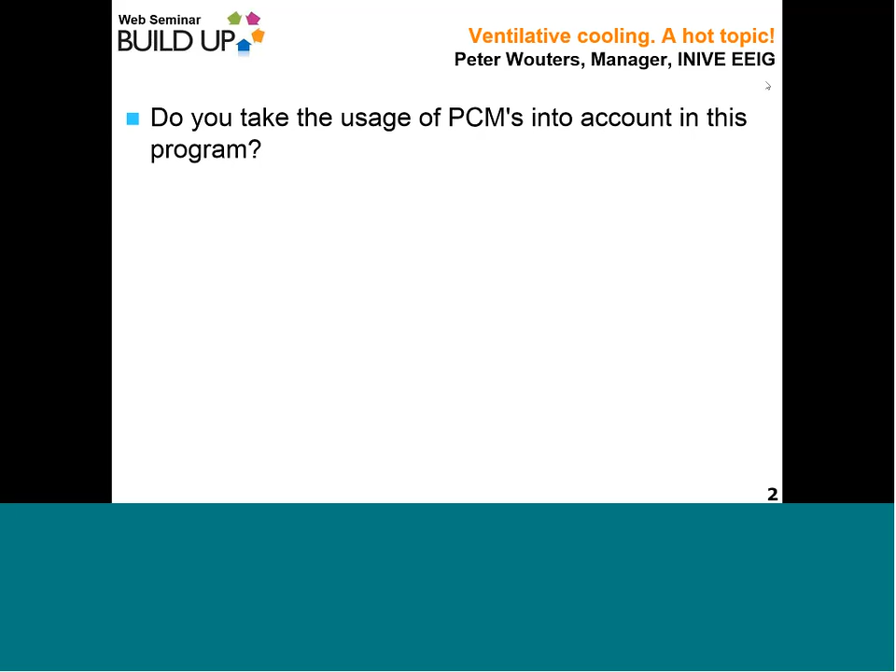Okay, thank you, Peter. Now let's go to the questions for Per. So Per, the first question for you is: the factor of speed of air circulation was mentioned in respect to perceived thermal comfort. Has it been found to have other influence, for example, restlessness? Actually, I'm not aware of that. There is some research progressing, but it's mainly focusing on what velocities are acceptable and what is the relation between temperature levels and acceptable air velocity levels. I am not aware of any influence on other parameters.

Okay. So the second question for you, Per, is what are the specific parameters that building regulations should take into account when specifying ventilative cooling in non-residential buildings, and is there a reference? We are actually preparing, summarizing all the work on this in this overview report. So we will in a few months have a reference on this.

Okay. What is important for taking ventilative cooling into account is, of course, that you have a proper calculation of the risk of overheating, and you have a proper calculation of the effect of ventilative cooling. And if we look at proper requirements in the building regulations, using passive technologies, you have to take into account that you provide a different comfort situation than when you use mechanical systems, and this is not always taken properly into account in the regulations. Yes, I think that's it.

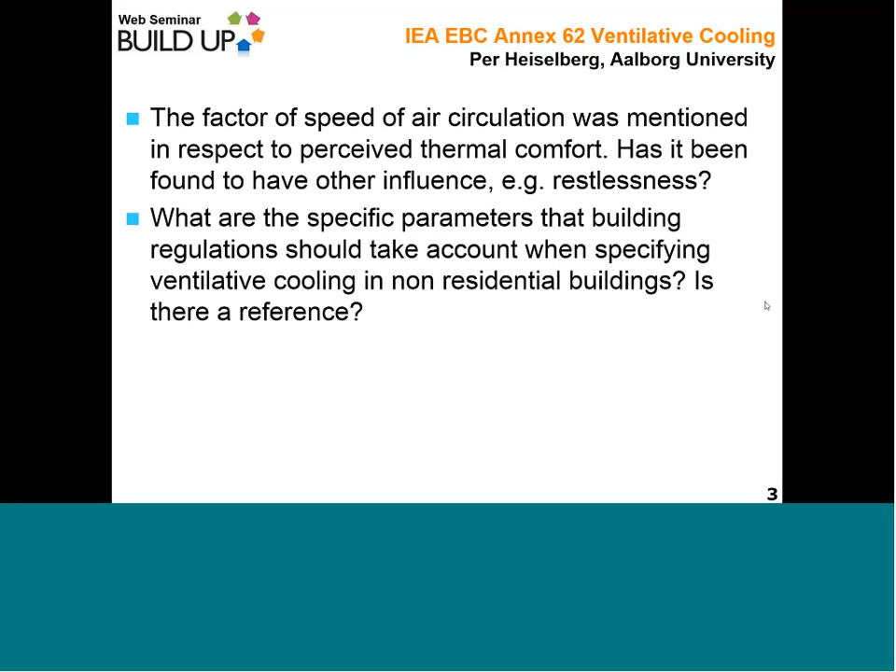Okay, thank you, Per. Now let's go to the questions for Flourentzos. So the first question regards the free slab geocooling, Flourentzos, and a participant asked for you to explain it a bit further. Flourentzos? Yes, can you hear me? Okay, yes. The free slab geocooling is

just: the building has floor heating, and so there is a heat pump heating the water in winter, and the water is circulating in the ground to run the heat pump. And in summer there is a mechanism that shunts the heat pump, and we only circulate the water in the ground and in the slab of the offices, and this reduces

the floor temperature by 2 or 3 degrees, and reduces the air temperature up to 0.5, 0.8 degrees. It cannot work as an autonomous cooling system, but it adds to thermal comfort because we have a cooled floor, but it is cooled without any cooling machine.

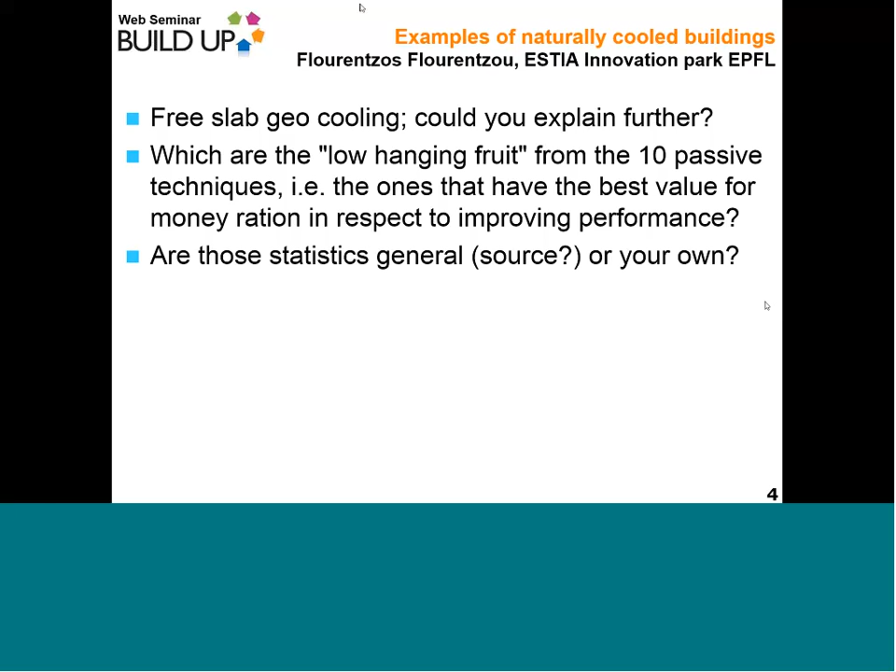passive techniques. Our approach is not to try, for every passive technique, and this is general, not only for passive cooling, to find how much it costs and how much you gain. This is an approach for when you change a lamp or when you change a particular machine. But if you design a building, then you have to have a global approach. And then the question is: is it possible with the budget of the building to have these passive buildings? And if it is possible, the architects will make choices, maybe not to put a granite floor and put the anhydrite screed. It is a completely mechanistic approach to try to always find payback periods, especially in the design phase.

So all the 3 buildings, I asked the architects, are constructed within the general cost of standard buildings, and the choices of the architects are done so that the building is within the budget of the owner. This is my answer to the question.

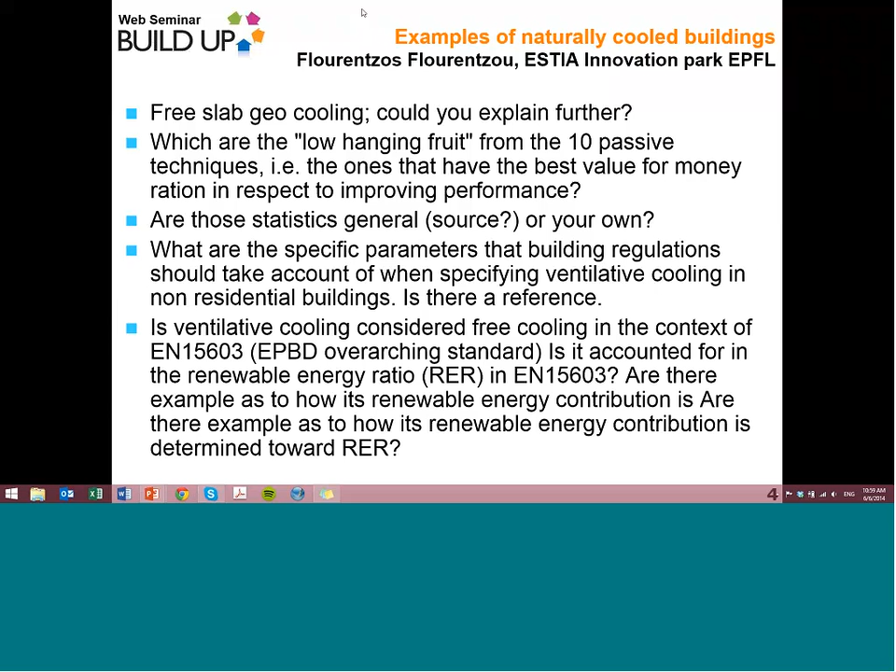One of them is, what are the specific parameters that building regulations should take into account when specifying ventilative cooling in non-residential buildings? But sorry, no, we have already mentioned this question.

And last question is whether ventilative cooling is considered free cooling in the context of EN 15603. Is it accounted for in the renewable energy ratio in EN 15603? And are there examples as to how its renewable energy contribution is determined towards a renewable energy ratio? So I think that this question is for Per. Per?

Hello, can you hear me? Yes. Yes, okay. Actually, I don't know. I'm not sure what is written in EN 15603 about this. So I cannot answer the question.

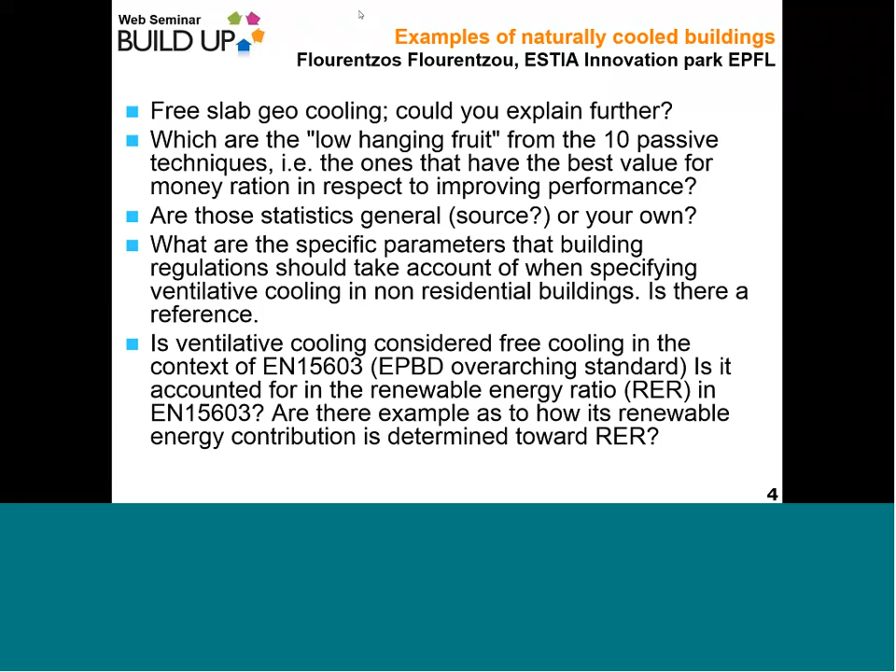The 30%, I calculated that by simulating the energy demand of the building by putting the setting temperature at 24 degrees, and then I calculated with 26 degrees, and then with 28 degrees, and then I compared the energy demand of the... Hello, can you hear me? Yes. So these are the results of 3 comparative simulations by changing the set point of this building.

For sure, these calculations concern the particular building, which is well shaded, which is having good thermal mass, where all the potentials for free cooling we can exploit. I cannot say the same answer for a building where the sun is going inside and so on. But for a low energy building, the simulations are not arbitrary, because we tested the simulations with the monitoring results, and the simulations are validated, and I find these differences.

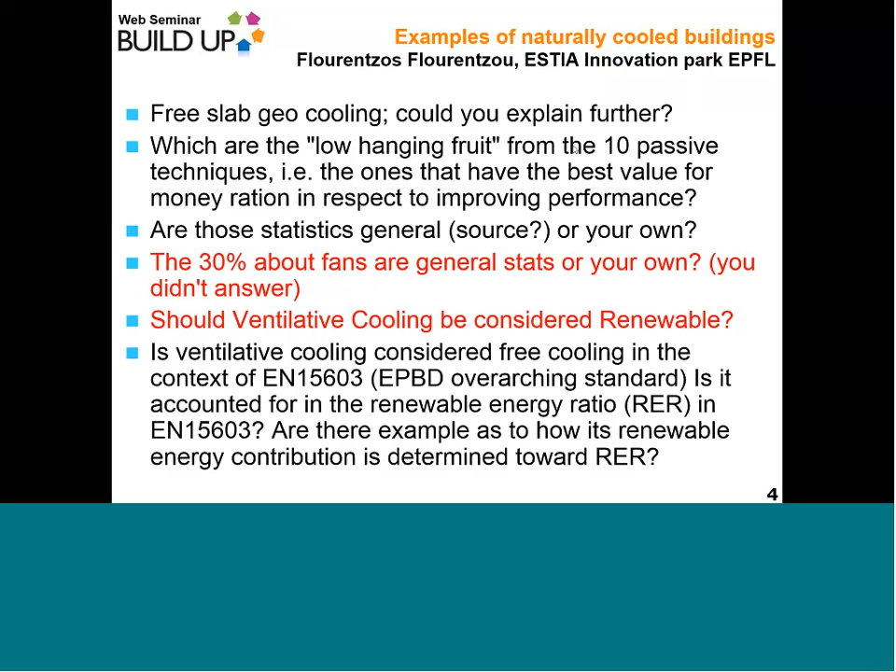Okay, Alexander, there is one last question. I don't know if we have time for that, which is whether ventilative cooling should be considered renewable or not. So anyone would answer this question? I believe that in terms of the Renewable Energy Sources Directive, it's not part of what is considered renewables. I'm not 100% sure, but almost sure.

So it is, as far as I believe, not part, so it cannot be used as energy for meeting the targets in terms of renewable energy sources. But if somebody else has a different opinion, please react. But I think it's not part of it. The only nuance is, for example, heat pumps. That is included, and of course they use outdoor air to cool down, in case of air-to-air heat pumps, but that's described as heat pumps.

If there are no other comments, I think we probably should. Yeah. No, I'll just comment that I agree, because I see ventilative cooling as a passive solution like solar shading or improved insulation and so on. So the main purpose is to reduce the load, and therefore it's not a renewable energy source.